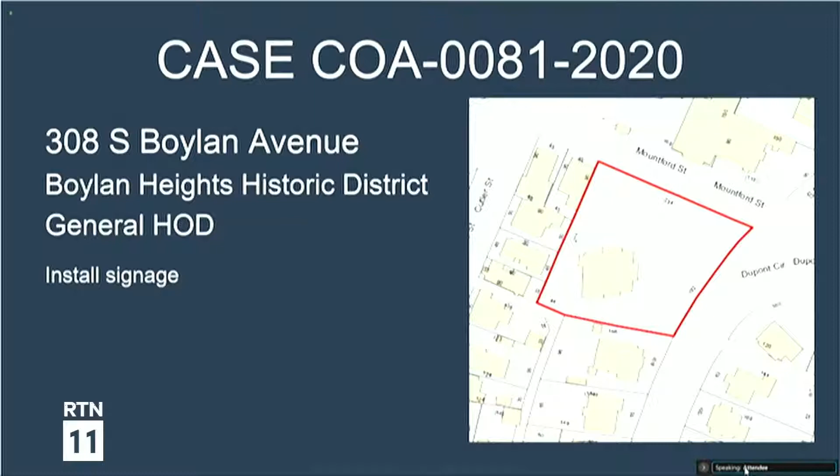So the applicants requested to appear on this agenda, but no materials were received prior to being able to write a staff report, so staff did not make a suggestion because of that. New materials have been provided since the agenda was posted, and that included sign drawings and mock-up photographs, which were posted on Monday for your review. And that's all I have.

I think what I'm going to do is call on Laurie Jackson to discuss their proposal with regard to this sign that was deferred previously. And then Colette, after we hear from Laurie and have questions, I'll come back to you because I still would like to hear what staff has to say and what your thoughts might be in the absence of the report. And then we will decide as a committee whether we're going to go forward in the absence of our typical findings or not, given that this matter is not as complex, since it's a single point.

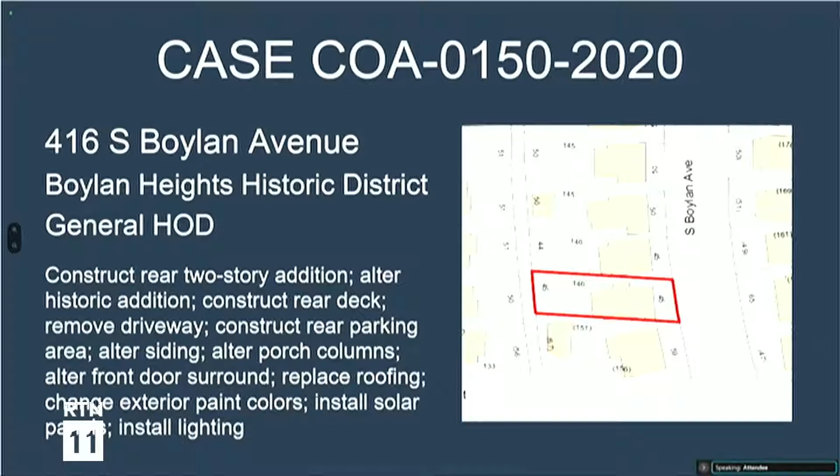I apologize if we uploaded an old staff presentation. Next slide.

Staff suggestion is to discuss the proposed increase in built area and built mass to determine if it is substantial, and to approve with conditions.

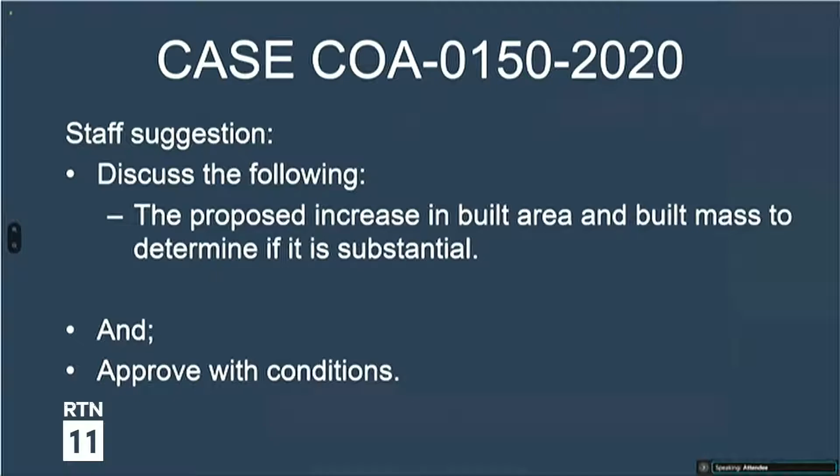The applicant has provided new information for this meeting. In addition to the new drawing set that you were provided previously, which includes the existing site survey, plans and elevations highlighting the design alterations from the initial COA submission, there are corrected comparative mass examples—the color-coded table with rounding of percentages to make it easier to read—and a proposed foundation plan.

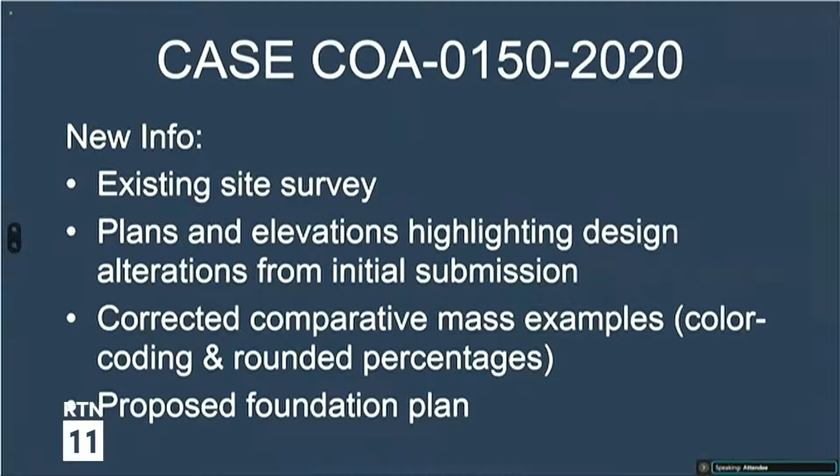So to reiterate, the solar panels are no longer part of the application, and the removal of a partial piece of the front porch—which the applicant has stated was part of that 1970s alteration, to restore it back to the original front porch configuration—has been added.

All right, thank you. Now Meg, if you could just succinctly bullet-point the changes you made, since we were all pretty familiar with this project at this point, and let us see where we are now, and particularly walk us through your calculations on mass, et cetera.

Oh, well, I'm going to be the first to admit that this is not my medium for conducting business. The fact that it took me half an hour to get into this meeting, and I'm doing it off of my phone, is just further testament that this is not an easy way for me to do this. But I did submit some supplemental materials that I don't know if those are going to be shown or not. I was sort of anticipating that they would be shown at this meeting.

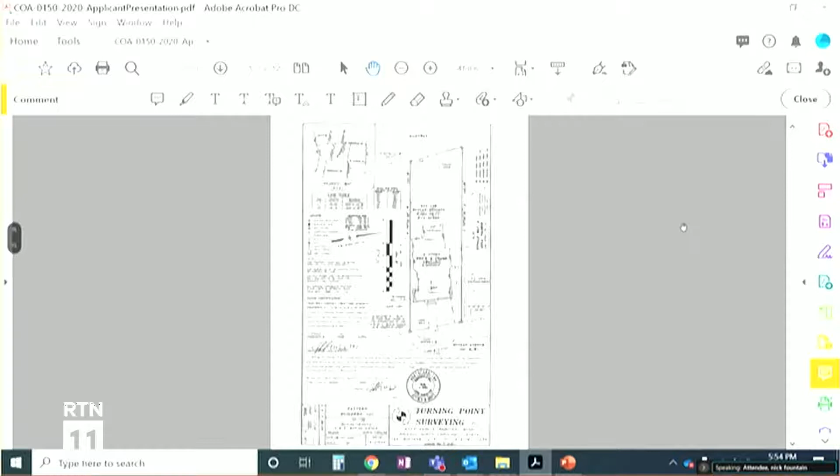It's not much, but okay, here is the initial site plan that we've got. As you can see, the driveway starts on the neighbor's property, and it's within 1.3 feet of the southern property line, so we have a lot of problems with this building already. Okay, next one.

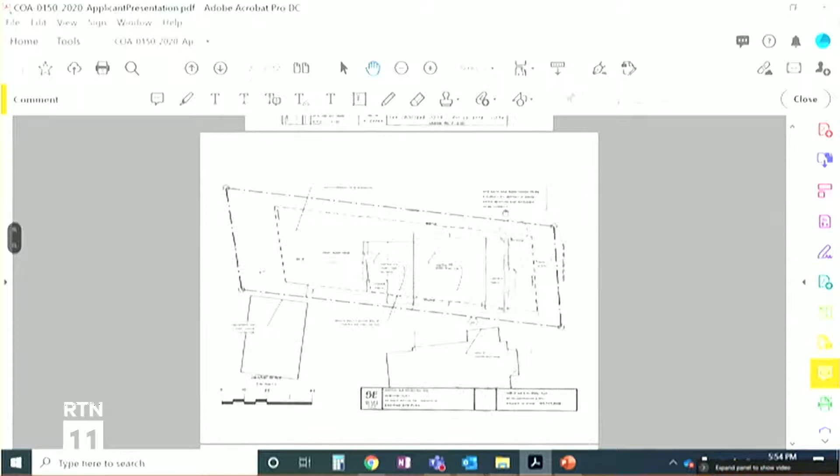These are more the things that you have seen before, a comparison of what is there and what we are hoping to do. Now, I admit that because we're trying to get historic tax credit, the rules are quite different, where we're allowed to count everything existing for our space. So there's been a little confusion about that. The next slide you've probably seen enough, but what you haven't seen is that we are taking off some of that front porch. That's the only new thing in that drawing.

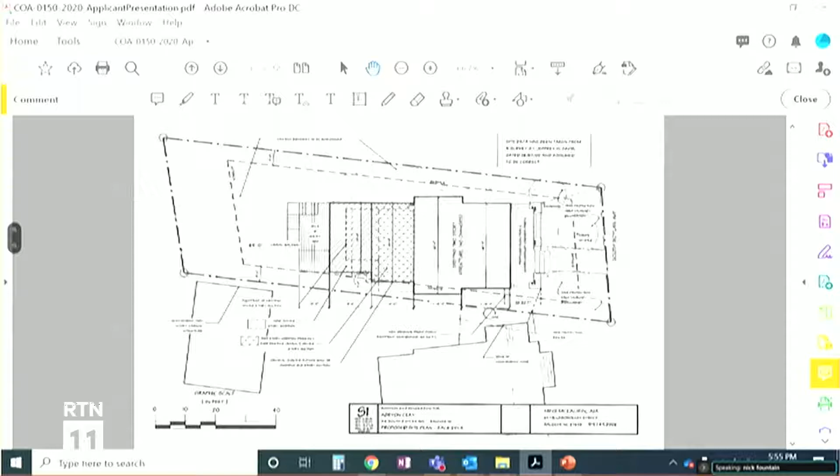Okay. This is what we proposed the first time we came to meet like this. And the next drawing is what we have reduced that volume to. The very black lines show what we have taken out.

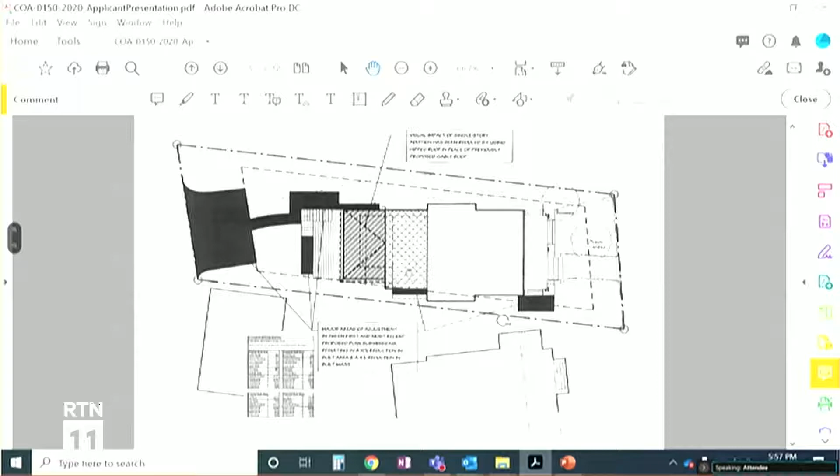However, I have since been told that the owner would like to reinstall some of the parking in the back. I had taken it out because, although it's a long, skinny site, the fact that it looked like it went from one end to the other seemed to be a stumbling block for everybody. So I proposed removing the parking in the back, but the owner told me she would like it. I don't know if I have to get a separate application for that. That item was never a point of contention in any previous discussions as far as I was concerned, so I'm putting that on the table to see if there's a possibility of sneaking some of that back in. Okay, next slide.

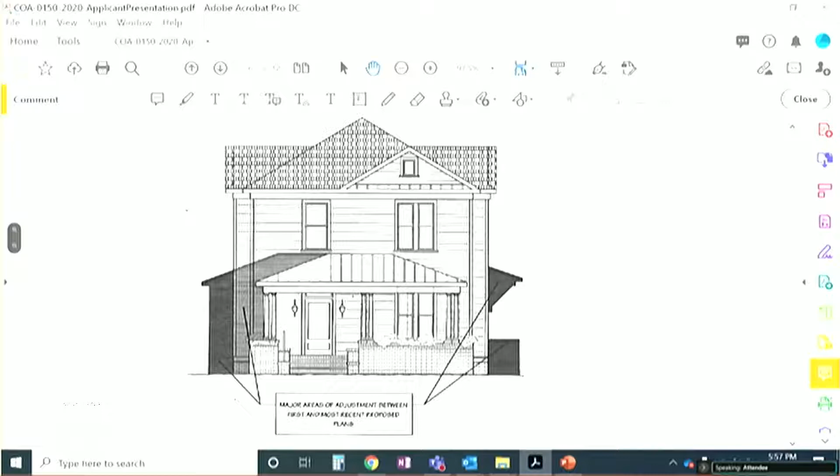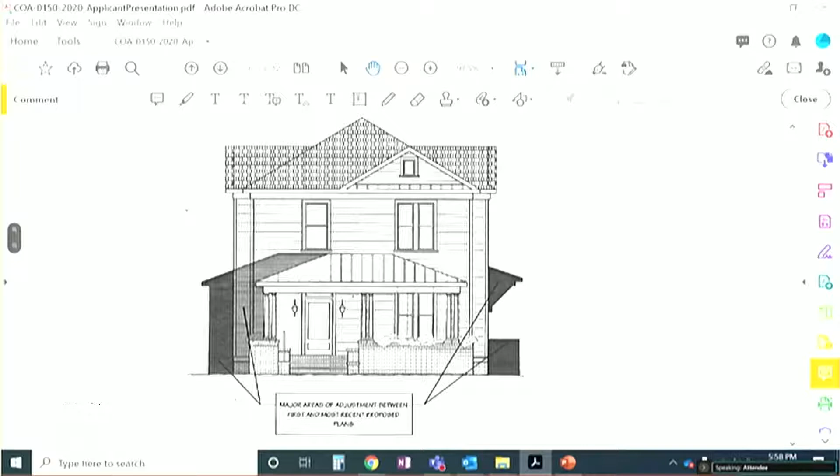The next ones I did were just to show you the volumes, because when you look at an elevation drawing, unless you have the previous drawing, I don't think you can tell how much we have taken off to get this mass down to less than significant, although I realize significant is a subjective term. These dark areas are the areas we have removed from the initial application.

It's probably most significant on the back, where we had a mudroom. Part of this is just my background—additions often help pay for a whole house remodel by adding square footage, but apparently that's not a tool I can use in the historic district. So it's not going to justify the cost of the addition or the remodel, but that is the amount we took off. Since you had been so adamant about it being a significant addition, this is my significant reduction of that addition.

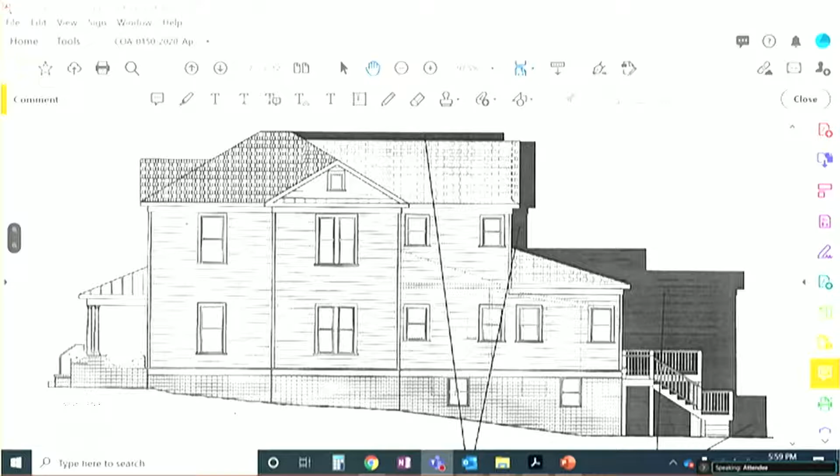Okay, what's next? These are just more of the same from different areas, showing what we took off. The other one should be... okay.

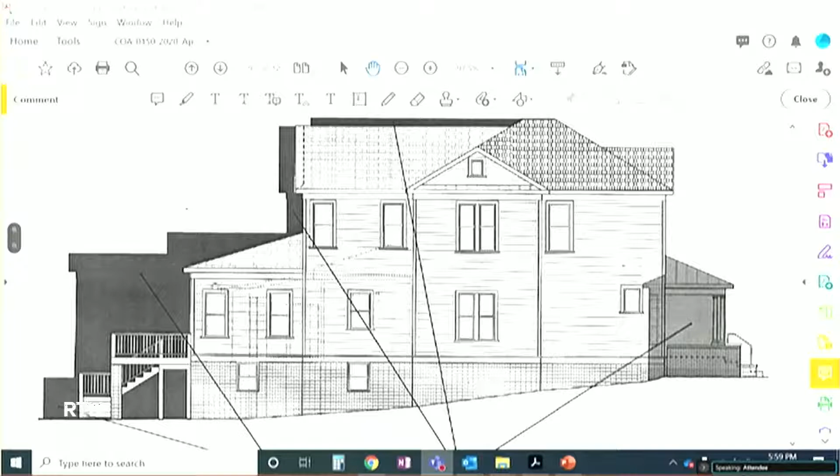I did not do the calculation myself because we disagree on a few things, like where to start the calculation. So I let Aaron, who volunteered to do the calculations, do them, although I contend our addition is about 2% less than what she thinks it is. I think I should be able to claim it, even though it was a really bad addition—there are other additions in Boylan Heights that just aren't as obvious. So the question of whether it's really 44% coverage or 42% coverage has to do with whether the second addition, which I think dates to 1968, can be included in the existing proposed built mass. That would take our increase from 11% down to 8%.

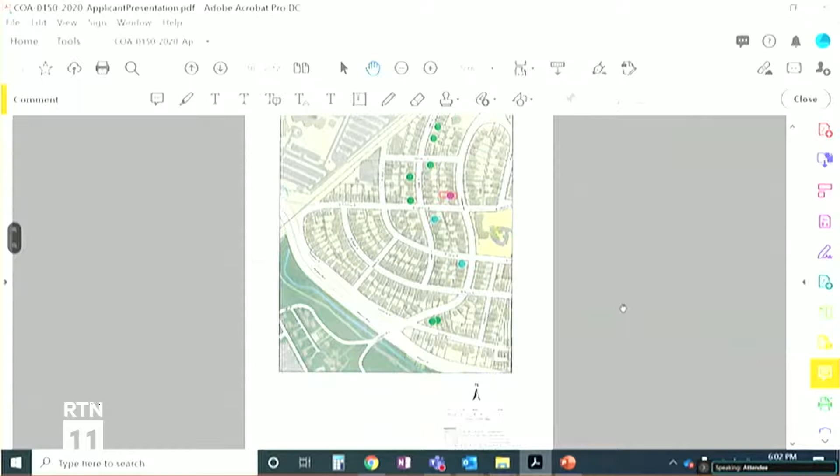I know this is kind of boring, but anyway, so we did do those calculations, or Aaron did those calculations. I feel like they're...

I'm contesting the part about not being able to include existing, but that's okay, I'm not going to dwell on that. The next slide just shows how many are more than that.

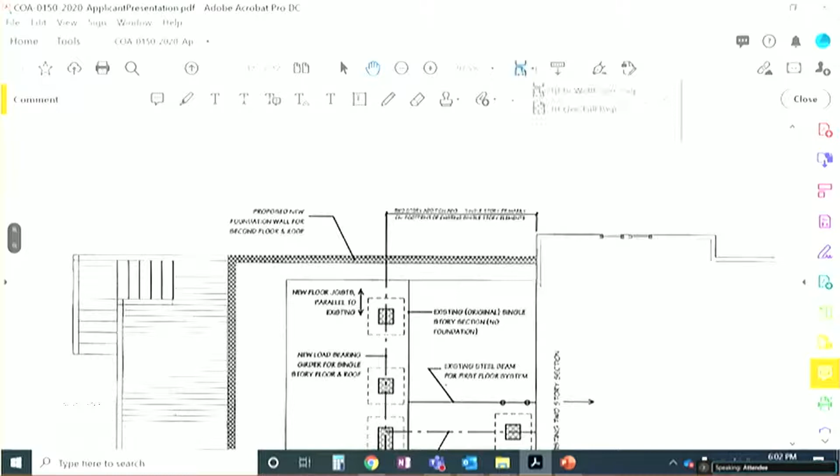This particular slide is because there is no footing. The part that's shaded light gray is the part that is allowed historic tax credit from the SHPO.

The fact that I am trying to put the structure on the sidewalls rather than on the existing rear wall is because there is no footing under this building.

So I am creating new footings, and I am spanning, well, I think you can see what I'm doing. I'm trying to go outside the existing footing/non-footing to have a place to anchor this new structure, the second story, without relying on the existing footings which are not there. So that's what I'm trying to do.

The first floor is there. We are going outside it by 1.5 feet on the north side. We're going inside it to where the original footprint was. It has been added on to over the years, but we are trying to get the structure not to put any additional load on the existing building.

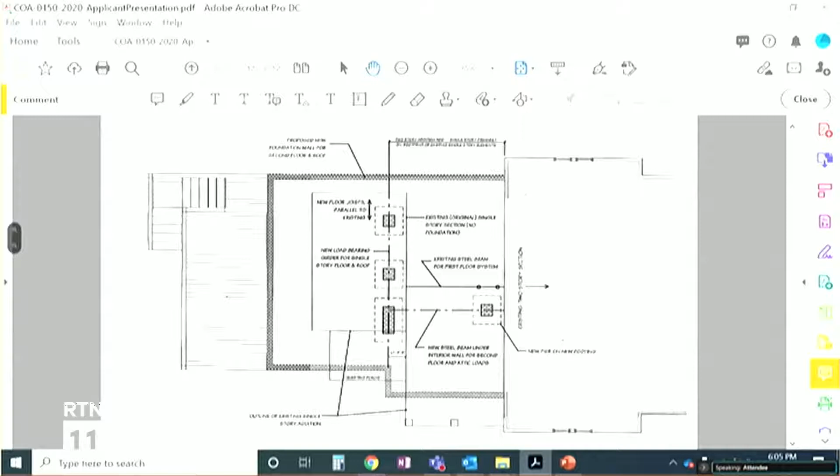Now, this application really started as just an application to reduce the size of the front porch. But because the other application was deferred, now they're all rolled into one application. So I have redone the application to include the entirety, including the porch reduction.

If you have any questions, I would be happy to answer them. I know there is a ton of information in there because I looked at it myself and there's all 3 applications in there. But I think we have done what we had been asked to do and kind of hope that we can move on.

Well, yeah, I'm sure you do, Meg. Thank you for that. Oh, wait a minute.

I expect I have 3 things going here because I've got YouTube on one computer and my phone is how I have to talk to you. So sorry, there's a big delay between the 2.

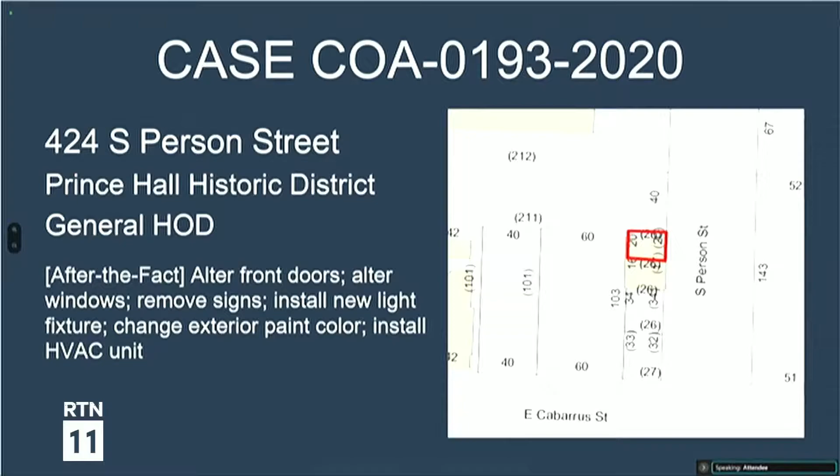As a reminder, on the map there, this is a contiguous building with 2 separate addresses, so we're just looking at the northern half of the building. Here's a photo of 424 South Person from South Person Street. Right about where that tree is centered up is the property line, so we're looking at everything to the right. And this is a photograph of the current condition of the building.

With some additional detail photographs provided by the applicant, still showing the front facade there. And this is the rear of the building, and the portion of the rear that is 424 South Person. And the existing, current condition of the rear of the building, the west wall.

Staff suggestion is to discuss the following: the significance of the large metal sign on the front facade, and the congruity of the proposed rear window configuration. Should the committee choose to render a decision, staff suggests that the committee approve the application with conditions. And that's all.

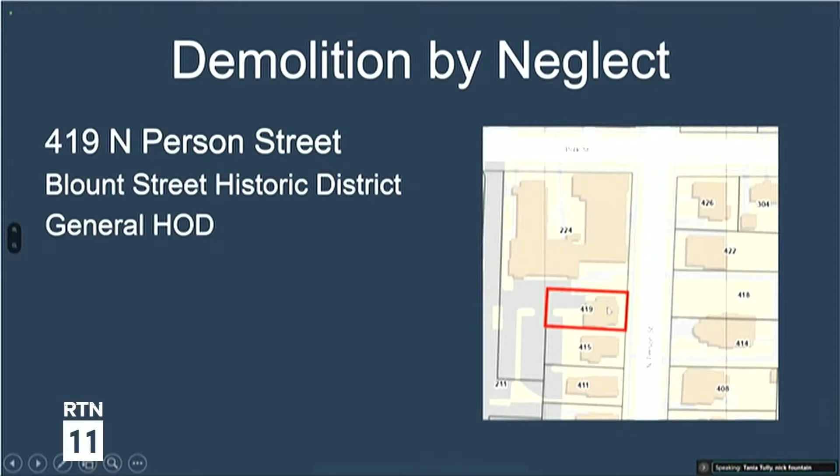Tania, can you tell me which one is 419? Here, I'll show it real quick, the map. Okay, is it in the row of houses that were all moved? Yes, that's where it says 224. That's the Murphy School. So it's the one just behind Murphy School. No, I know the one. It looks pretty bad.

So the owners have filed a certificate of appropriateness for a minor work just this past week, I do believe. Colette will jump in if I got that wrong. You're correct, it was approved on Tuesday. Okay, so we still have to go through the process, but just to let you know.

All right, I will send you the information on what you're supposed to look at and a sample report. Yes, if you will, and let us know what the minor work covered, since we might have major problems and only a minor work application. I'd like to see if they're just talking about slapping some paint on and it's not going to do anything about the rot and the rest of it, then we probably still got a problem. So we'll provide that as well.

I think I know the house. Does Matthew live right along there somewhere? Yes, he's on the corner. Yeah, okay, all right. Anyhow, we'll coordinate on that.

Ian, you getting ready to say something? The owner of the property contacted me this week asking for pictures of the house, and he gave me the impression that they were going to start some work on it pretty soon, like immediately, as soon as they can. This is Aaron, just for further context on the minor work. We've been emailing with him this week, and Ian, he mentioned his communications with you. So we've alerted him that the minor work is approved. I won't be sending him the placard until I'm in the office tomorrow, but it'll be up on the website by the end of the day tomorrow, so if you all want to go take a gander at the minor work, it'll be there.